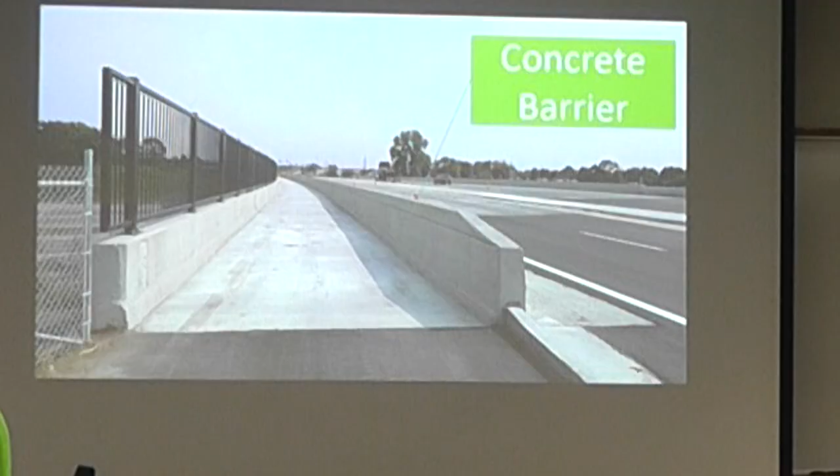So the primary purpose of the barrier is to provide separation with traffic, and in general the primary purpose of the railing is to provide pedestrian safety. This picture shows an example of the function of both of those things. On this one, we have a barrier separating traffic from running into pedestrians or vice versa, hopefully keeping pedestrians from running into traffic, but you never know. And the railings here keep the pedestrians or bicyclists from falling off the bridge, hopefully.

So here's a little video about how barriers do matter. Maybe of all the bridge construction items, barriers aren't really that interesting to talk about because there usually aren't too many questions or confusions when building them, and they aren't super interesting to construct either. But hopefully this video plays, because they do serve a purpose.

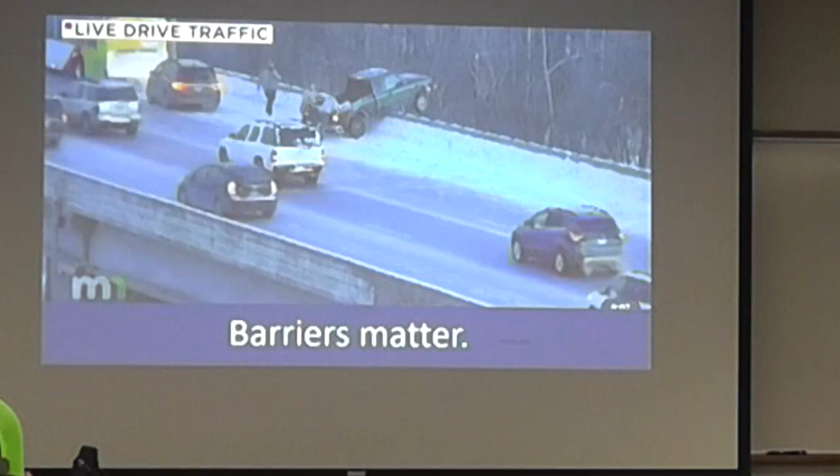Wow, that escalated rapidly. Fire down there. See where you go. Yeah, so this was, I believe, on the ramp of Highway 10.

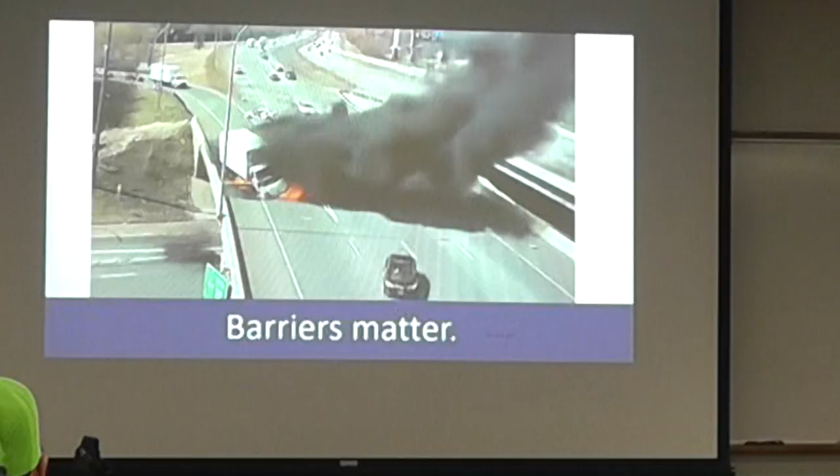But on this one, you can see the barrier served its purpose, right? No snow here to create that kind of ramp.

So hopefully those examples give you a little bit of an idea of why you should care about barriers.

One of the main things is safety, obviously saving lives. As you saw in that video before, the barrier didn't do its job, and who knows what would have happened if the truck went over.

So they help direct and keep traffic on bridges and in the direction they should be traveling. Basically, their purpose is to keep vehicles and the people in them on the bridge and not go over.

Lots of agencies, including MnDOT, spend millions of dollars crash testing barriers to make sure they're tall enough to keep large vehicles from crashing through, and redirecting vehicles back onto the bridge. The focus is to make sure they're strong enough that vehicles don't crash right through. So safety, stability, geometry and shape of the barrier plays a big part, and barrier strength is important.

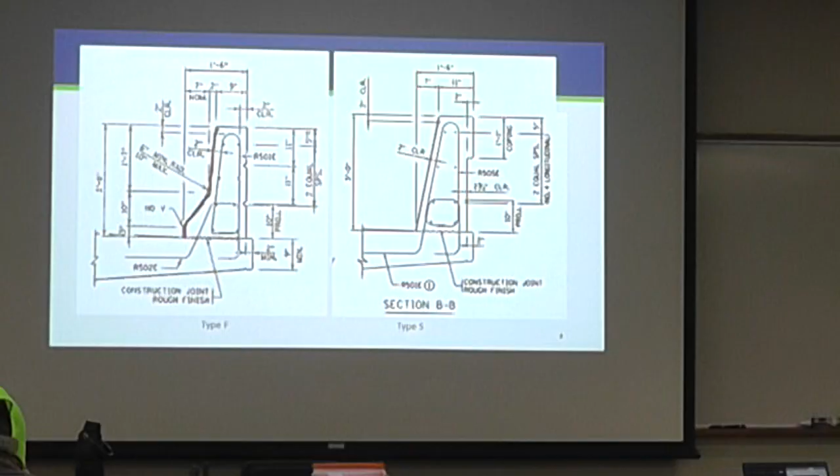On the left is the old F-shaped barrier, and on the right is the type S barrier. You can see the straight base of the barrier. This shape is for high-speed roadways and exhibits more consistent crash performance through testing than any of the other previous shapes.

A lot of these pictures in the presentation are also from the previous F-shape barriers, so keep that in mind as we go through. But now bridge plans have pretty much all been updated to include the S barrier. You might see some F barriers if there's a transition, creating a transition from the old type to the new type.

You can't immediately go from an old type F to a type S barrier abruptly, because then you create a snagging hazard due to the difference. So you might see a transition during construction as well, if you're connecting into an old one.

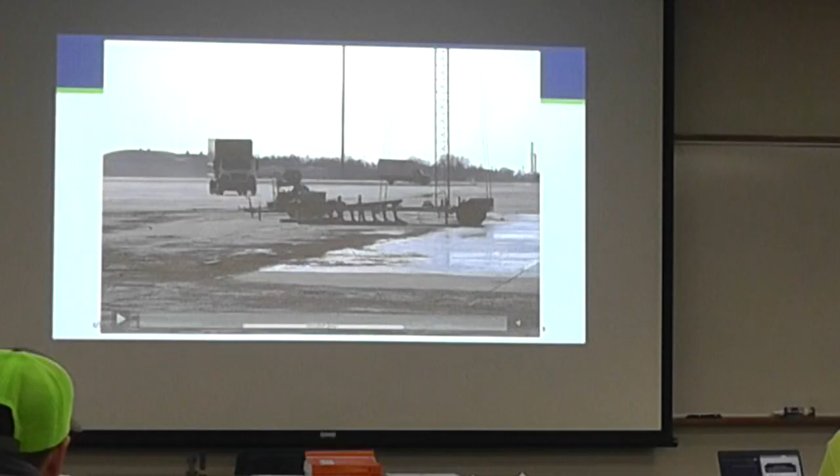So all barriers require crash testing and have to meet certain crash or test levels to be used. Bridge railings in these crash tests must prevent the vehicle from going through the railing, prevent barrier debris from entering the vehicle, smoothly redirect the vehicles, prevent rolling over, and ensure the impact on passengers from the crash is low too.

So I think this is a video as well, if it plays. Maybe not. Well, that was supposed to be a fun video of testing, but I guess it's not. I don't know, it is.

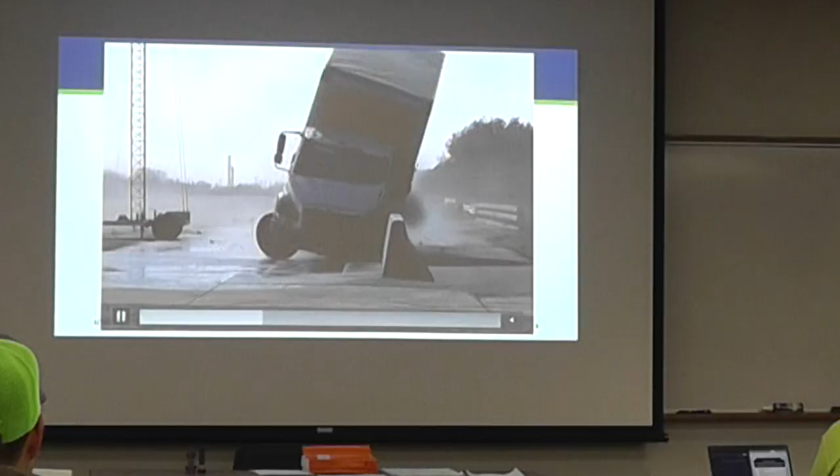Yeah, so you can see how the barrier does its job. It redirects the vehicle, prevents it from going over, and also tries not to significantly harm the driver. So that's the goal, to try to save everything as much as you can.

So another video, you can see the profile of this barrier. The slope of the barrier will actually cause this vehicle to ride up the barrier.

With the older shape, back when they crash tested these, they considered riding up the barrier positive, because it dissipates some of the energy from the hit. But obviously that could lead to rollovers and stuff. So now we've opted mostly for the single slope barriers.

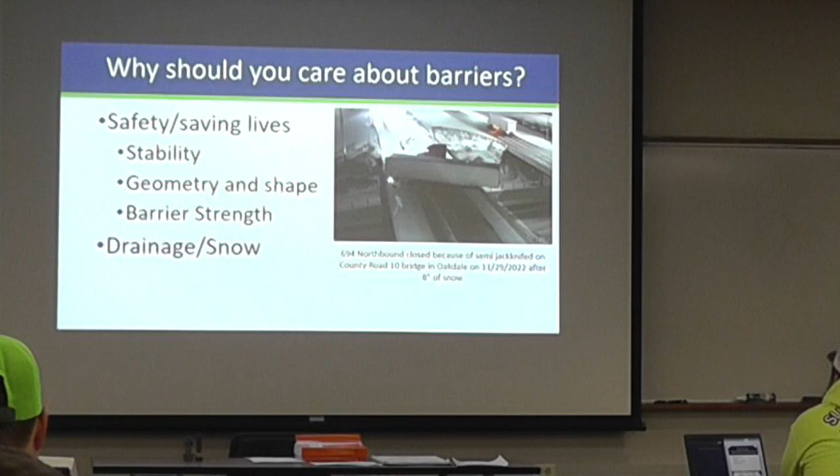Geometry refers to the shape of the system, trying to prevent rolling over and stuff.

Barriers are also important for drainage and snow. You saw in a couple of the videos how snow can pile up and create a little ramp too.

Making sure that rain and runoff is directed off of the bridge along the gutter line, keeping it from pouring off the edge down underneath the bridge onto traffic or whatever's down there.

It also leads to deterioration of the edge of the deck, due to the salty snow runoff.

Snow plows also use barriers as a guide for plowing, and it can be helpful to stop snow from going off the bridge and onto the traffic below during plowing.

Aesthetics is important too, even though it's not necessarily a safety or strength concern. A well-constructed barrier is important to the traveling public, and making sure it looks safe to people is also important.

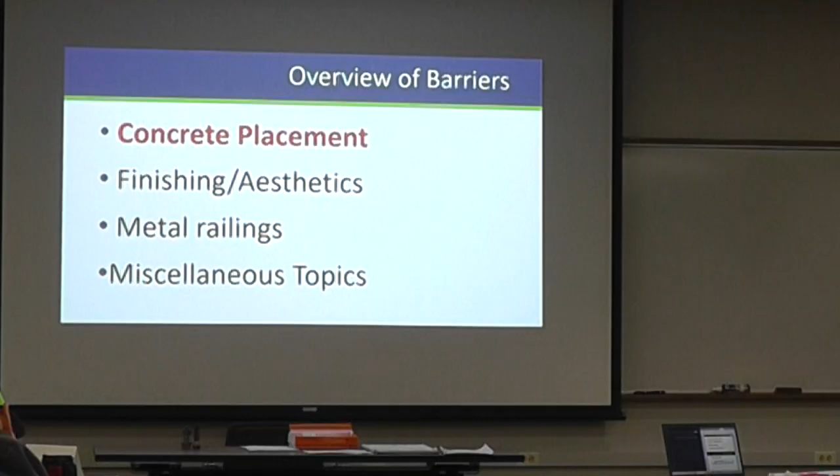So in this section we'll go over an overview of the key points of barrier construction, with a spotlight on where to look in the spec book to make sure your work meets spec. Four main topics we'll cover are concrete placement, finishing of the barriers and aesthetics, metal railings, and any miscellaneous topics that don't fit into the previous categories.

For concrete placement, to ensure that we meet stability, shape, and strength of barriers, following the standard specs and the special provisions for concrete placement is important.

If you look on page 352 of your spec book, there's a couple of pages there that are pretty important for concrete, probably some of the most used and most important for concrete bridge construction. We usually recommend putting a little post-it note in that section, because for concrete you'll be referring to that a lot.

One of the more important pieces of information in there, on the bottom of page 353, says to clean set concrete of loose material and dirt before placing fresh concrete against it. That's important - make sure you have a clean surface for the new concrete to go on.

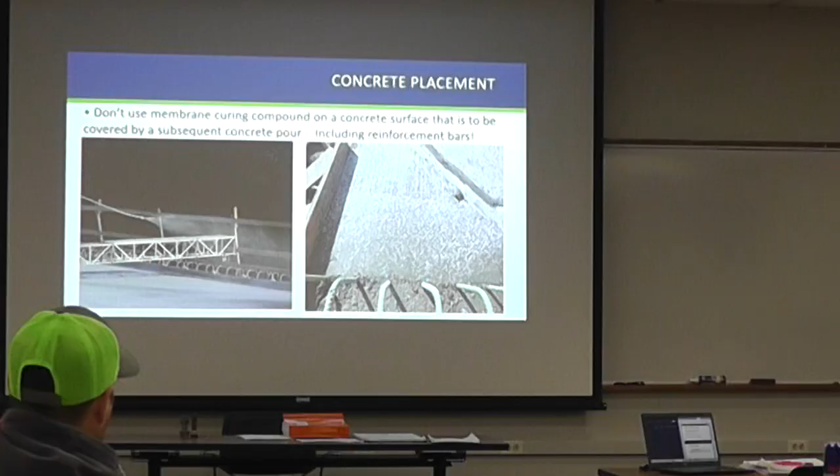In this picture, the barrier dowels should have been covered with wet burlap before spraying the cure. That's a good lesson to make note of.

The concrete barrier shouldn't be placed without authorization from the engineer until deck falsework has been removed or loosened, and after an acceptable bridge slab cure has been obtained.

The contractor can choose between two forms of construction for barriers: hand form construction or slip form construction. For slip form barrier placement, it's like a Play-Doh type mold where you use an extrusion machine - make sure they bring out the correct shape if you're using the mold.

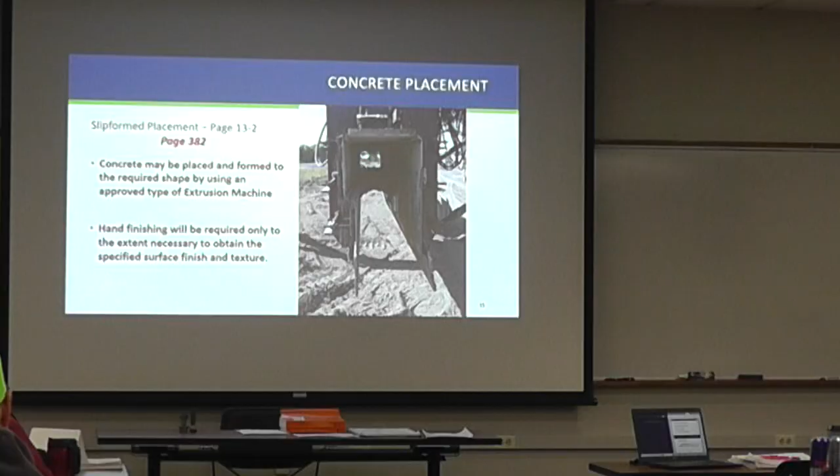When slip forming the barriers, we have to be sure that the concrete has less than 1.25 inches of slump. Concrete with slumps greater than that will be rejected. This helps maintain the uniform line and grade of the barrier. With consistent slump, the cement finisher will obtain a uniform texture through the pour too. This information can be found in the spec book, as well as the concrete mix.

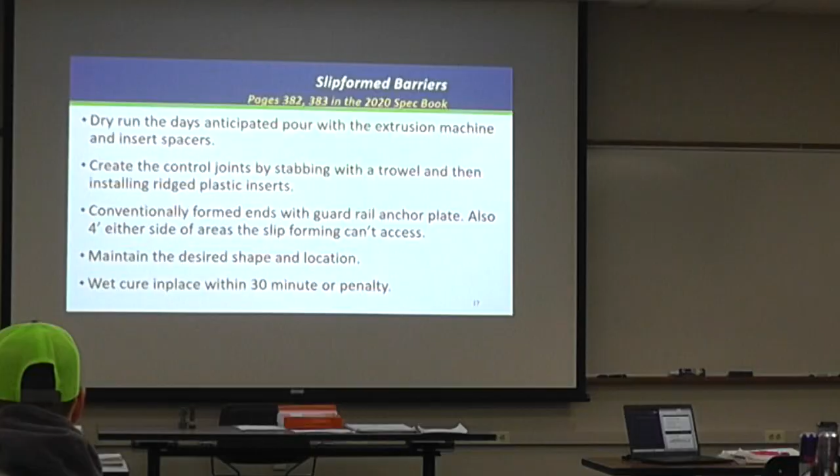With slip form barriers, before they pour the barrier, the contractor has to dry run the anticipated pour and check clear distance from the slip form template to the reinforcement. The contractor also has to make the control joints by installing rigid plastic inserts, as well as conventionally hand form the ends for 4 feet on either side of the joint, at the ends of the slip forming or where the guardrail anchor plate is located. Most importantly, they have to get the wet cure in place within 30 minutes.

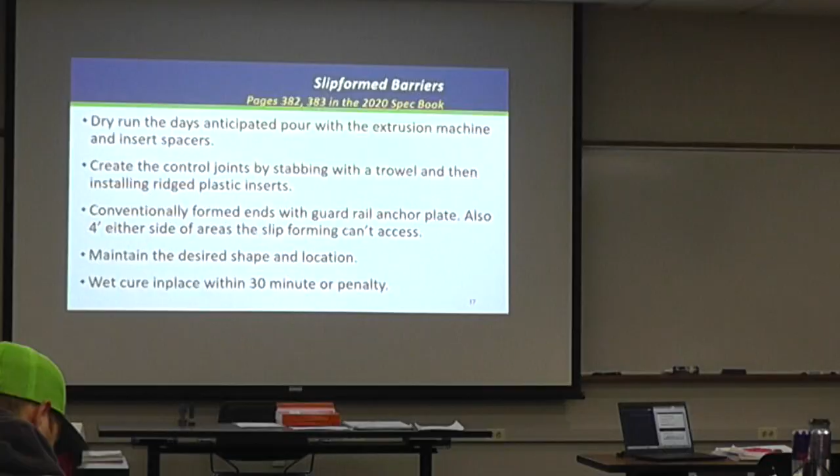I believe the department will monetarily deduct money for every 5 minute period or portion after that.

Regarding wet cure, special surface finish is considered a curing compound as per table 2401.3-3. I believe this is on page 373 of the spec book. You'll see that the concrete barriers, parapets, and end posts require a special surface finish. AMS curing compound is not an acceptable curing compound, and special surface finish 2 is an acceptable method of cure.

Here we have an example of hand forming while slip forming a barrier. There is a lighting conduit cast in it, so if we have a light blister that is different in shape than the mold, they wouldn't be able to slip form over this section. This short section will be hand formed after the rest of the barrier is slip formed.

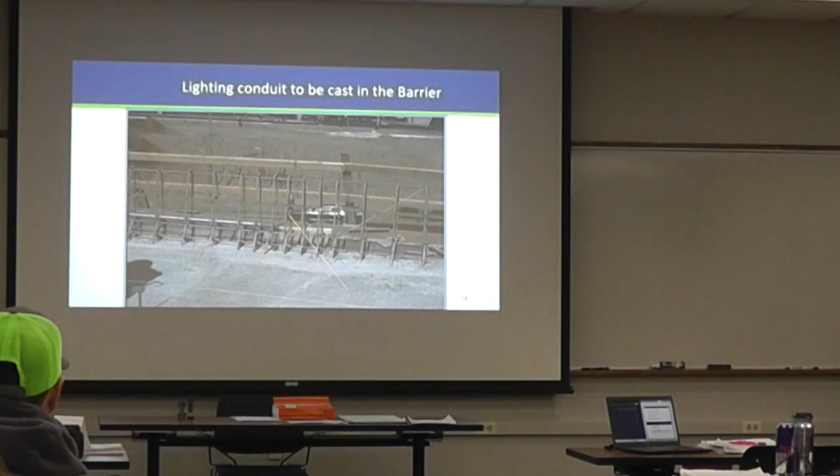Another picture here, you'll want to make sure they have at least 2 inches of clear distance from their reinforcement on the front face. Check the plans too, some plans have even 3 inches of cover. This clearance is important because you want to try to keep the salt away from the rebar as best as we can.

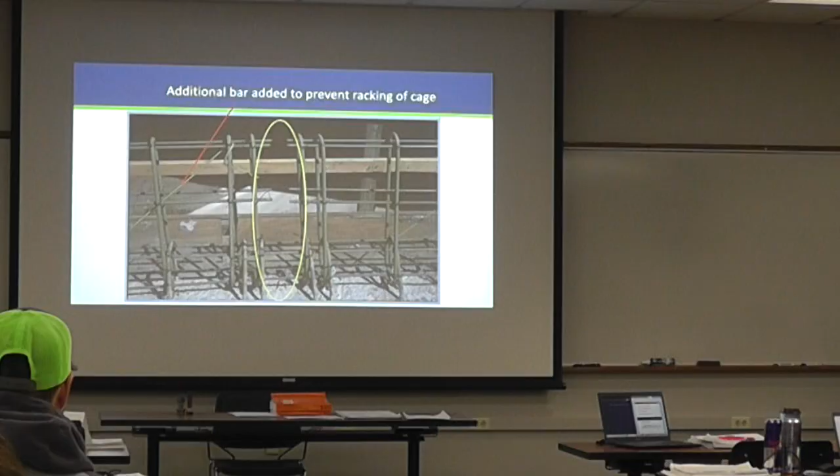If slip forming the barrier, the contractor needs to install additional reinforcement, these little bars, to make sure the machine doesn't pull the cage along with the form. This one's an old picture, so the longitudinal reinforcement is tied continuously now. You don't have these gaps, which create a weak point in the barrier, and we don't want that.

Here's an example of something that we think is a result of the shifting slip form, and it pulled the rebar to lap over the bridge joint. We aren't 100% sure of what caused this, but that's something we suspect, so making sure the slip forming isn't pulling the rebar is important.

If the contractor can't slip form the barrier and has to hand form it, the form shall be either metal, wood, or suitable material capable of sustaining the concrete in the proper position until the concrete is set. It shouldn't move when you start pouring wet concrete, and the forms must conform to the required shape and design.

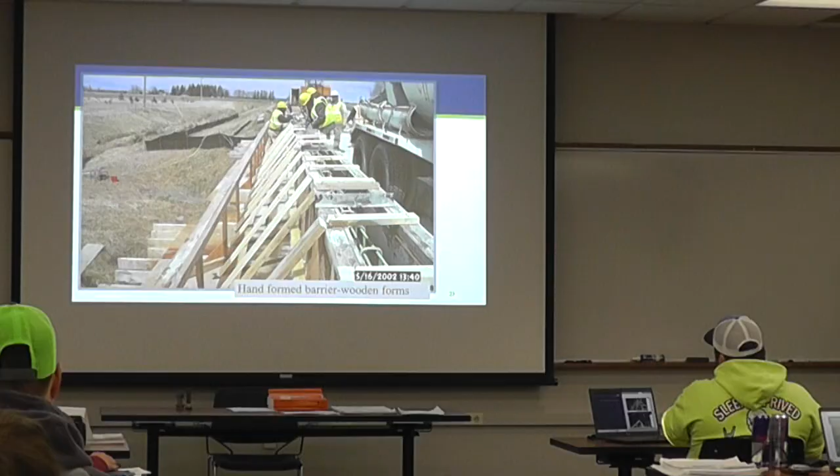The placement of the concrete shall be controlled to prevent segregation. As they pour the concrete into the form, there's only a small opening at the top of the barrier, and there's all sorts of bracing. The rocks will want to segregate out of it, so it needs to be vibrated to fill all the voids, and struck off to finish the elevation and create a smooth finish. Make sure the contractor does not over-vibrate the concrete. Over-vibration will cause segregation, in which the cement and sand could travel to the surface, leaving a weak surface that weakens the barrier.

When pouring these cast-in-place barriers, we're going to keep the shape of the forms that were constructed and signed off on. Concrete weighs a lot, so it has a tendency to blow or widen out its forms if you don't have these bottom walers. Make sure the contractor has the snap ties and rods to the correct dimension to keep the form from moving while pouring. It's important to keep the form from moving.

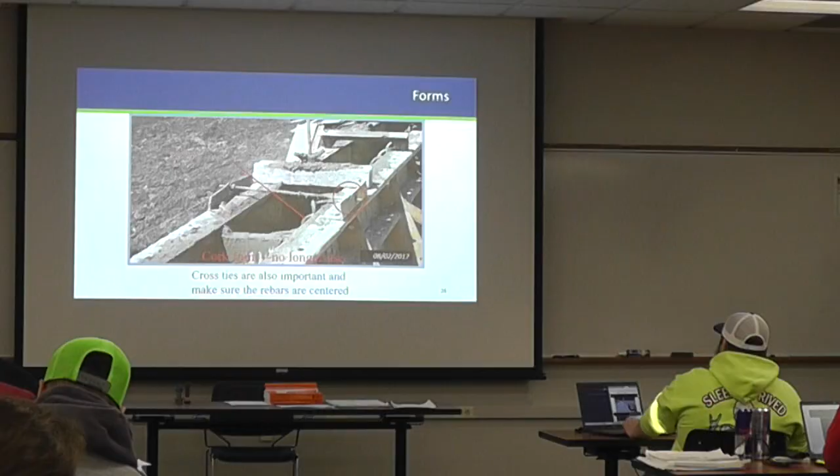Here we also have these cross ties to keep it lined up. So here's something that happens if you don't have enough bracing on the wood forms, it doesn't meet our minimum surface tolerance of a quarter inch of deviation within 10 feet of length of barrier.

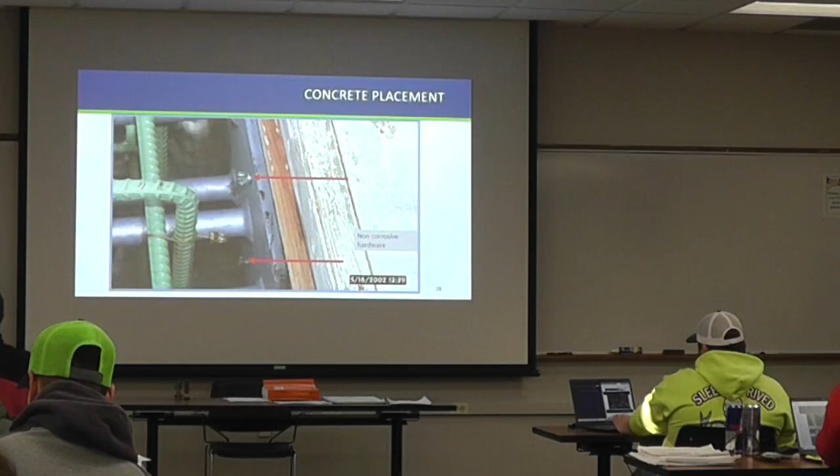Any hardware installed on the barrier must be non-corrosive. Where a guardrail is installed, these sections can't be slip formed, so they'll always be hand formed. Make sure nothing there can rust or deteriorate over time, and check the barrier and railing details in your plan set to ensure the contractor is installing the right guardrail anchor plate correctly per the plans.

Here we have a cover plate located at the expansion joint. Make sure they build this into their forms prior to pouring the concrete, and make sure the anchors for the cover plates are well embedded in the concrete.

A relatively recent change for barriers is that all four bottom longitudinal bars are now number 6 bars, they used to be number 4 bars. There's also a designer note now that limits the length of all barrier longitudinal bars to 40 feet. It was already in the design manual, but the note adds clarification since some people were stipulating longer bars in their plans.

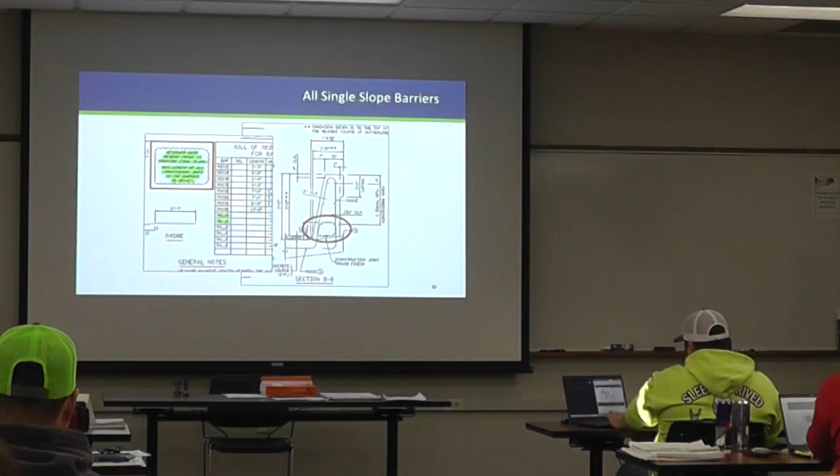Further, for removal, we used to require that the forms stay on for at least 12 hours. Now we just state that the barrier forms may be removed when the concrete is self-supporting and retains its molded shape, instead of putting a minimum time period on this.

You'll also see a table in the specs for curing requirements. For barriers and parapets, the minimum strength required to pull the form is when the concrete is self-supporting, so there's no minimum time. But we do have a maximum timeframe, forms must be removed within 12 hours.

After the forms are removed, the contractor is to round the edges to the radius shown in the plans. Even after the 12 hours, the concrete is still somewhat workable when they remove the forms, but after that point it gets tougher. The main thing is to make sure the concrete is self-supporting before removing the forms.

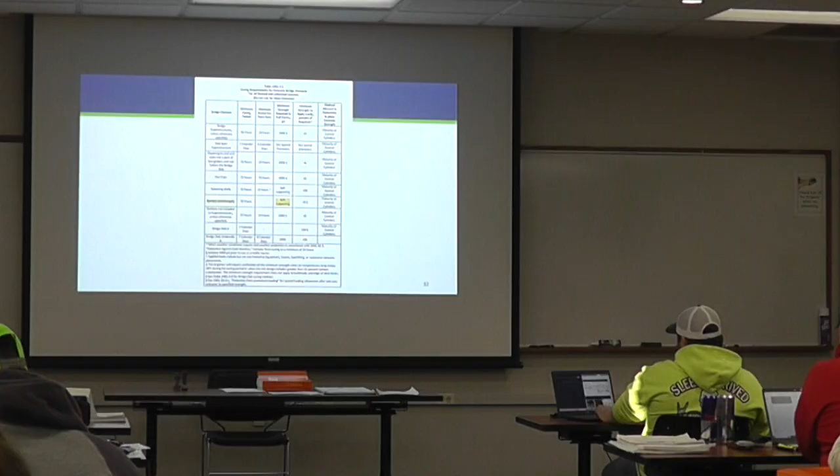According to the special provisions for special surface finish of concrete surfaces, the contractor is to remove the forms as soon as the concrete can retain its molded shape, and in no case shall the elapsed time between concrete placement and initial surface finishing exceed 12 hours. Everything I mentioned is noted in the special provisions.

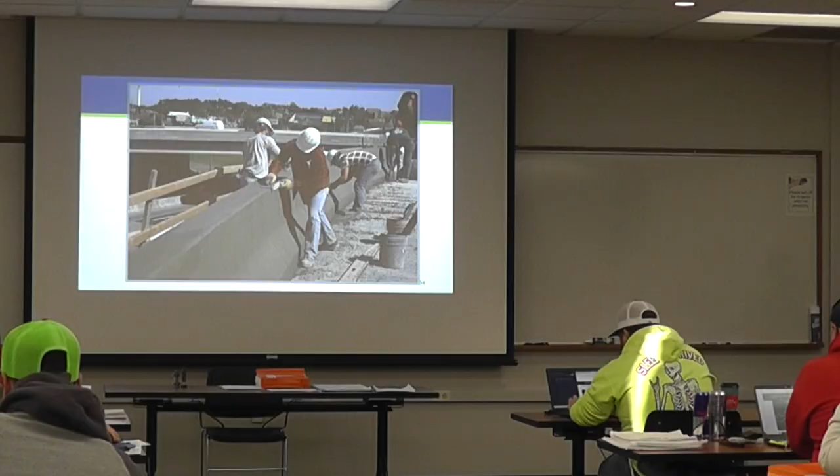After that, here are the barriers getting groomed after the slip form finishing. They'll go along and measure beforehand, or during their dry run, and spray paint on the deck each place where the rigid plastic inserts for the control joints have to go.

Here they're finishing the bottom edge. Note that line mark there, that's what I was talking about with the control joint location. Control joints are specified on the plans, and this newer control joint design has been used since around 2014.

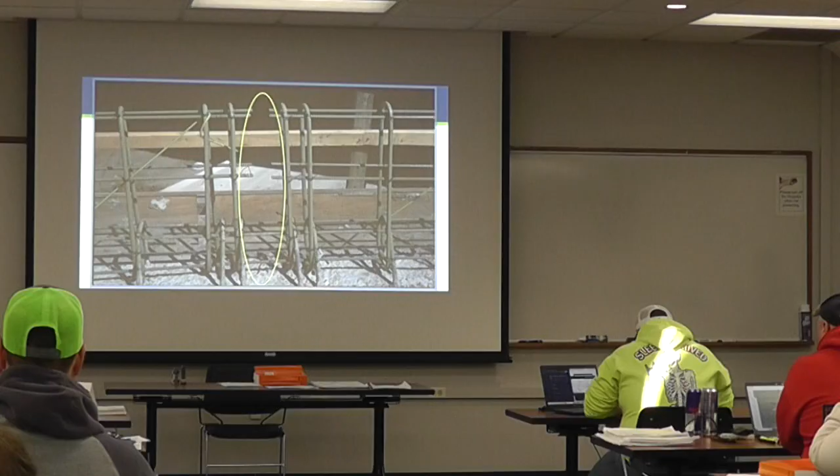Now we have continuous reinforcement along the barrier with control joints instead of cork joints. You can see the old reinforcement where it was cut off, but as mentioned before, that creates a weak point, so we don't do that anymore.

At the end of the bridge, the last few feet of the barrier, the dowels are spaced much closer together. That's because at the end is where we want to strengthen the barrier the most.

For slip form barriers, they're using plastic inserts for control joints. Popular ones are the zip strips and the speedy joint, both currently on the approved product list. Just look under the crack and joint materials products, then look for the rigid plastic extrusion.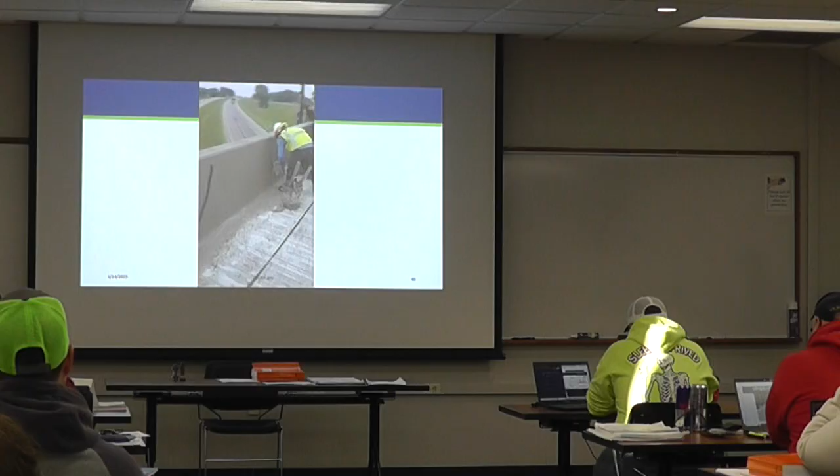Here's a quick demonstration of the process after a slip form barrier. They saw cut a relief of about 1.25 inches into it, then put in the plastic control joint. Then they finish the surface, and it's kind of hidden away now, so for people looking at it, it's not even there as far as they're concerned.

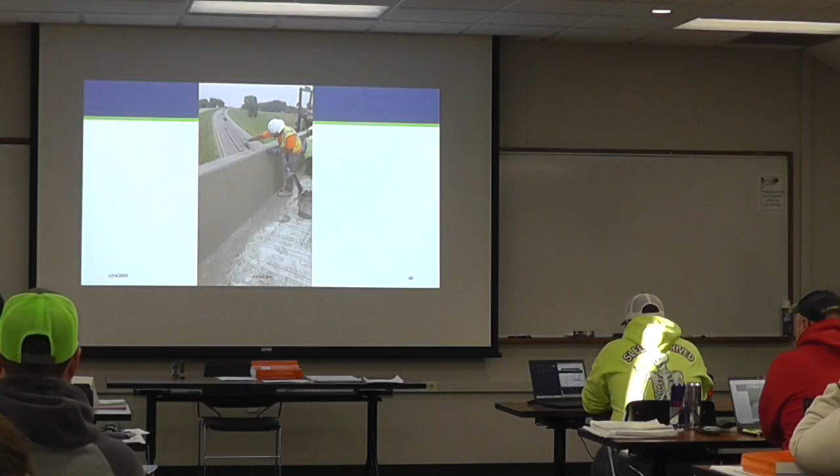Yeah, so this is a relatively new barrier install. You can't really see where the plastic insert was installed, except you see a little hairline crack there.

But we can tell by the shape of the crack that it's a straight line crack, and that's what we wanted. That's why that's where we wanted it to crack at the joint.

Compared to other cases when there isn't that control joint, it's not as straight. We want to avoid that.

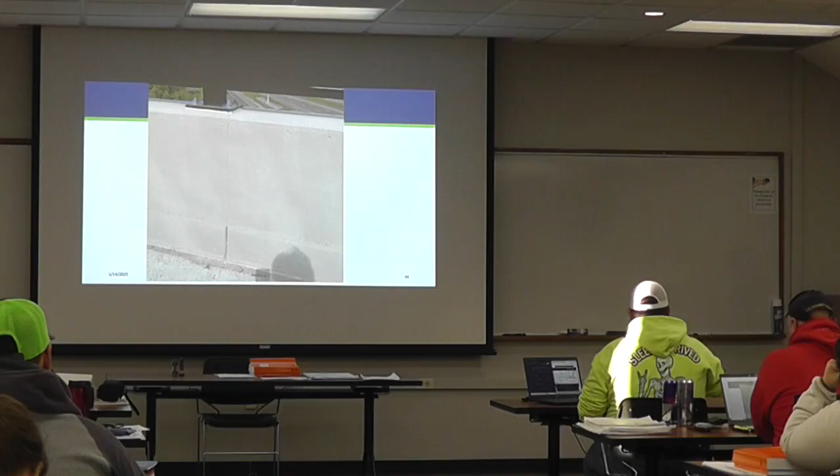One thing is, don't install control joints next to anchorages, because now the anchorage has less cover due to the location of the plastic control joint. There's more of a risk of failure.

Bridge plan details the spacing where the control joint should be installed, with spacings of less than 10 feet between each control joint.

You'll notice that according to the plan, none of the control joints are located at the same location as the anchorages for the railings. This sheet is actually for the previous picture we saw. So clearly somebody deviated from the plans and put the control joints where the anchorages were. So it's just something to pay attention to.

It's important to review the barrier sheets for details like that. For integral or semi-integral abutments, there's a saw cut in the joint in the deck between the bridge and the approach panel, which I'll get into later because there's an update for that, but you need to make sure this also includes the saw cut gap in the barrier at the same location.

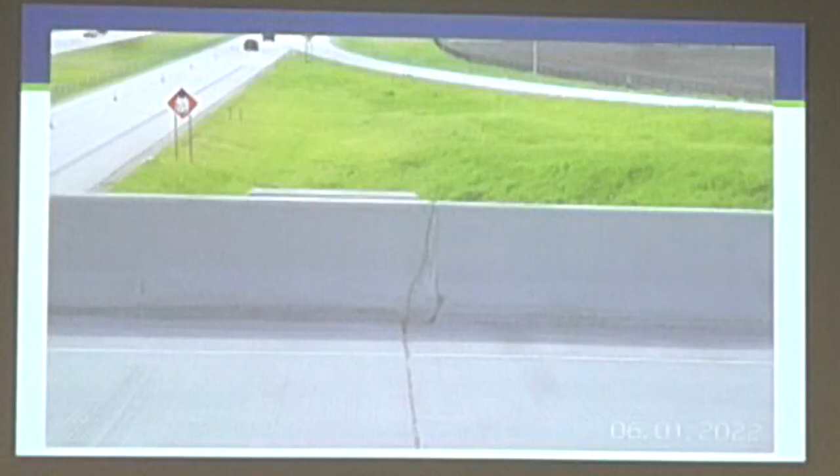Here's another example. This concrete is going to crack here, so our goal is controlling the cracks and putting the cracks where we want them, which is why we want those plastic inserts, so it's a more controlled crack that's straight.

One last thing to look for regarding these cuts is timing. Here's an example of the brand new barrier transition. The old barrier had a substandard end post, and part of the new approach panel, the barrier, I think on this one the bridge plans called for a 1/4 inch wide saw cut through the entire barrier width and height.

This shows that they just cut it partial depth and only on the front and top faces. So pay attention to details like that in the plans.

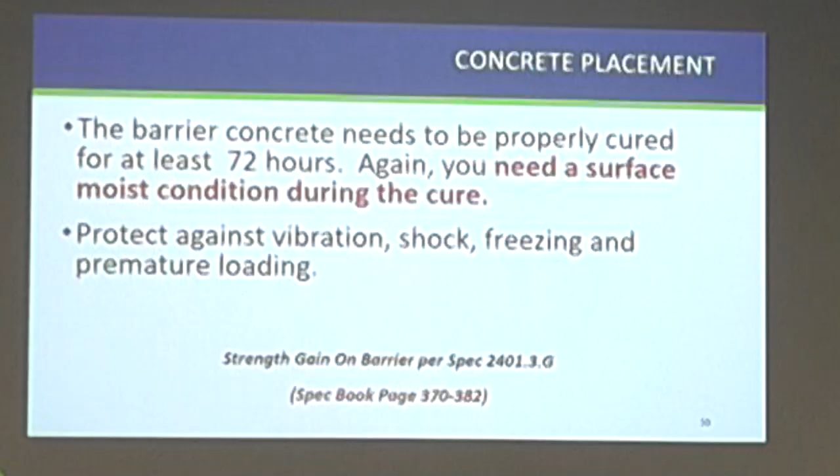Barriers need to be properly cured for at least 72 hours, and it needs to be a wet cure, so you need a surface moist condition during the cure, and then protect the barrier against vibration, shock, freezing, and premature loading.

The contractor can't subject concrete barriers to loading until it's at least at 45% of its anticipated strength. Don't allow heavy equipment on the deck. You want to wait until the barrier's cured, and barrier concrete needs to have reached 4,000 psi prior to opening to traffic.

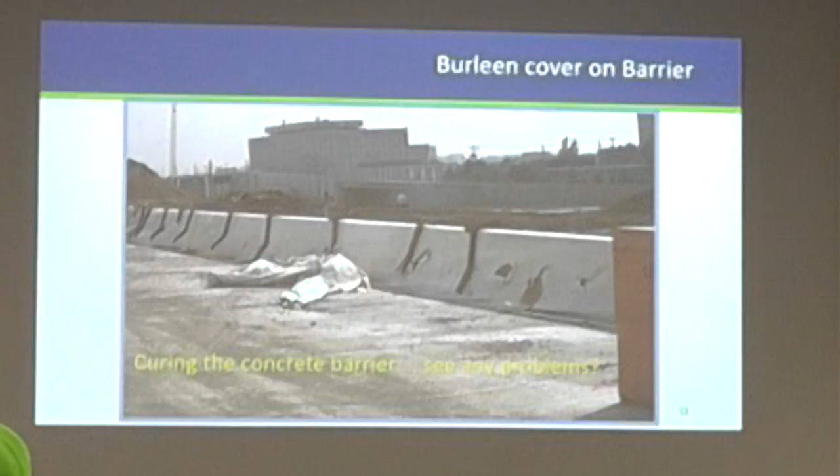Next section we'll touch on is the finishing and aesthetics of the concrete. Probably should speed things up here because I think I've got to keep on schedule.

All barriers get at least some sort of a finish. They may not always get what we call the special surface finish. But barriers that are conventionally formed will always get at least an ordinary surface finish, and then typically they will also get a special surface finish.

I think in one of your handouts there's this flow chart that'll help for special surface finish, which you can look at.

Historic bridges have their own sets of requirements, so pay attention to the special surface finishes for historic bridges.

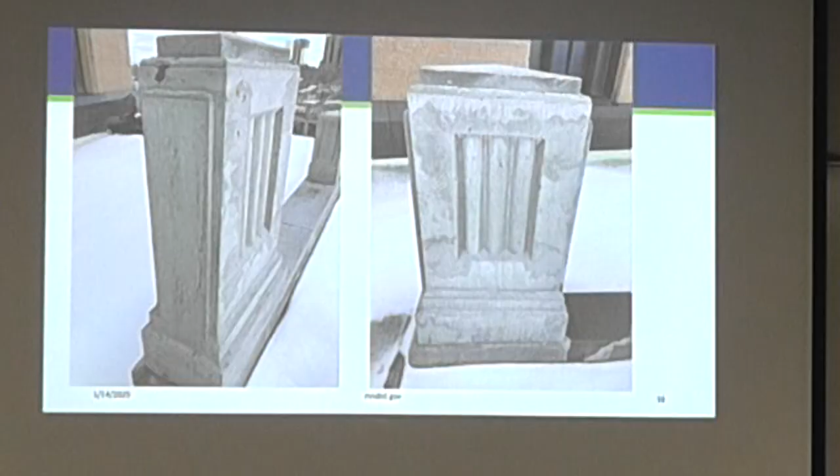Ordinary surface finishes can be found in your spec book. For these, forms should be stripped and the green concrete rubbed out immediately, but if they can't get the forms off without destroying the concrete, then they have no choice but to leave the form on.

If the contractor slip forms the barrier, it's a lot faster, and they can do about a few thousand feet in a day if everything is set up. Again, the ordinary surface finish will start immediately after removal of the forms and carried on to completion.

We're kind of getting away from special surface finish 1 and moving towards special surface finish 2. There's limited products like this, but it gives a lot more chloride resistance than other products. We're trying other products, but as far as I know, nothing's come of it at this time.

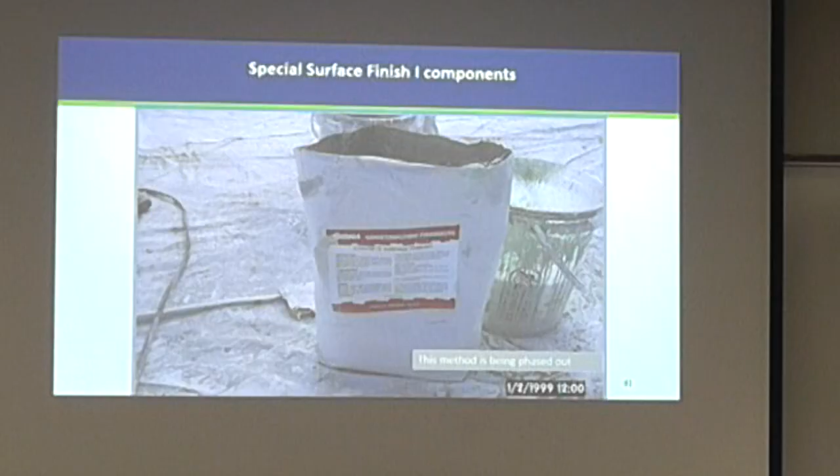Don't mix different compounds, always use the same brand components, and make sure it's applied uniformly. All surfaces requiring the special surface finish must be sandblasted or water blasted before application of the special surface finish. Power grinding is also allowed.

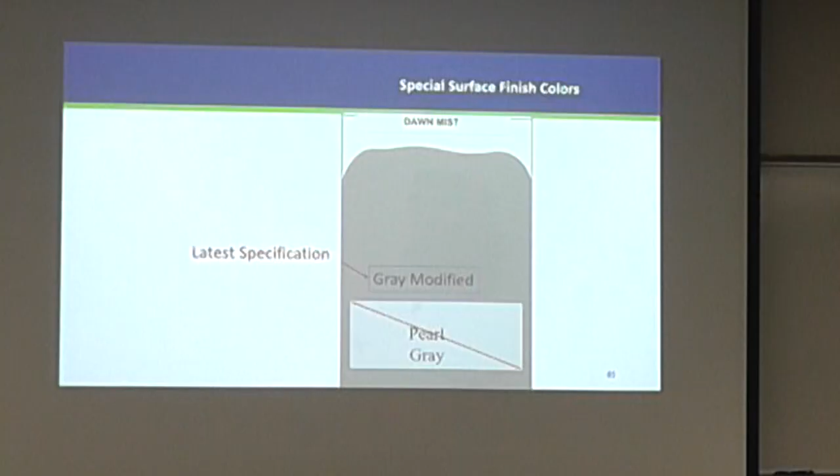I think the latest specs use a gray modified depending on the corridor. Certain projects attempt to match colors used in the same corridor, so just make sure to check your special provisions.

For aesthetics, for pedestrian crossings on the bridge, fencing is important. Normally we wouldn't go to these lengths for aesthetics on bridges, but for special cases there are requirements.

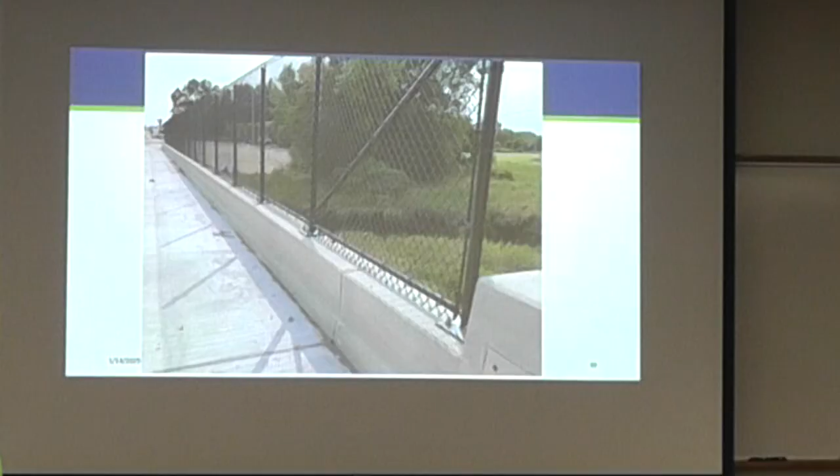The chain link fence can be galvanized or vinyl covered galvanized chain link. Check the specs if they want anything different. Different cities use different types of ornamental railings, some are historic too, so keep checking the specs.

The next section I'll go through is the metal railings.

I think this happened a few winters ago - a high-speed chase with a stolen vehicle. It came in way too fast, crashed through the railing, and actually went over the barrier. Just another reminder that what you do is important.

Like on here, yeah, barriers - even though it came at the wrong direction, it slowed it down enough. So I guess the lesson here is metal railings are not intended to keep vehicles on the bridge. They're designed to keep pedestrians and bicyclists only, not to stop a car. So that's the Jersey barrier.

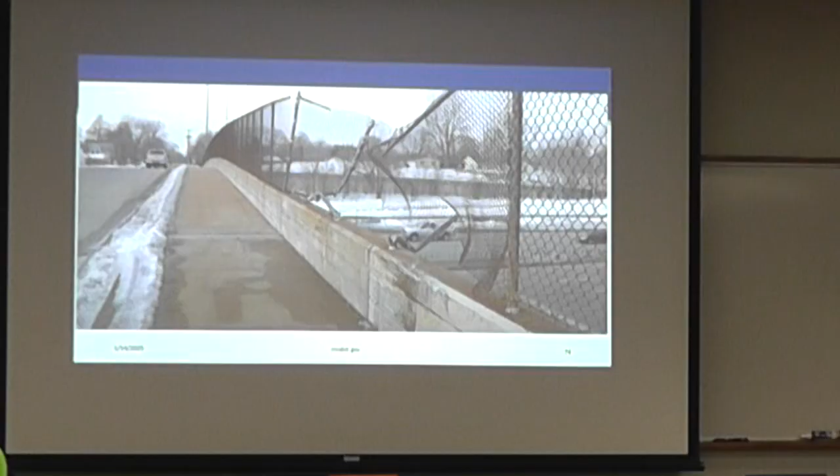There's another story, the result of a crash involving 4 vehicles. A driver hit a stalled car, crossed the center line, then plowed into a semi, and the semi went over the edge of the deck. This is the Clark Memorial Bridge in Kentucky.

I don't know if you noticed something on this bridge - it's just the metal railing and not the barrier. Remember what I said about the metal railing, it's not intended to keep vehicles from going over the bridge. So the main takeaway is the barrier keeps cars and vehicles on the bridge, and metal railings are for pedestrians and bicyclists.

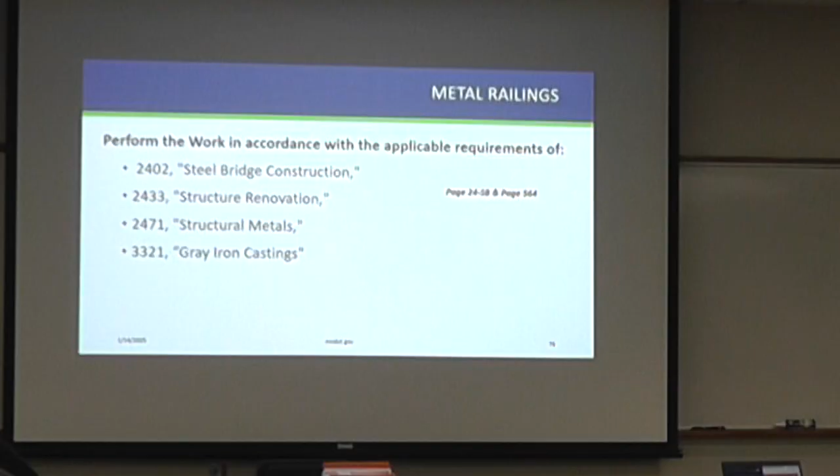So these are the specs for steel bridge construction, structure renovation, structural metals, gray iron castings for your metal railings. All the materials must conform to plan details.

Make sure they're galvanized - if the spec says to galvanize them, that they are. Check the paperwork, basically, is the lesson here. Check the specs.

Make sure there's nothing else missed. Make sure the shop drawings have also been reviewed and signed off by the bridge office, because some of these things can be picked up in shop drawing review too, so hopefully it doesn't get to the point where you're out there constructing and you notice something.

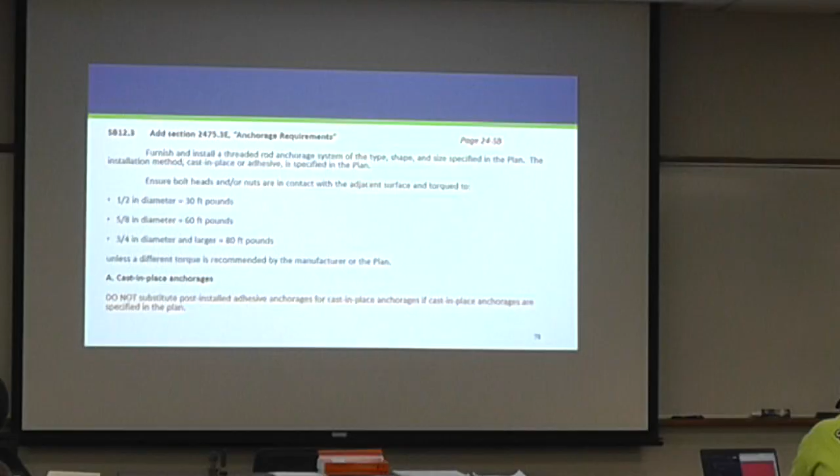In the special provisions, you'll find info for the anchorages for metal railings. As for the anchors, use cast-in-place type anchors unless otherwise specified in the plan. Typical size is 3/4 inch diameter bolts, which need to be torqued to 80 pounds unless the manufacturer specifies something else. All these things can be found in the special provisions.

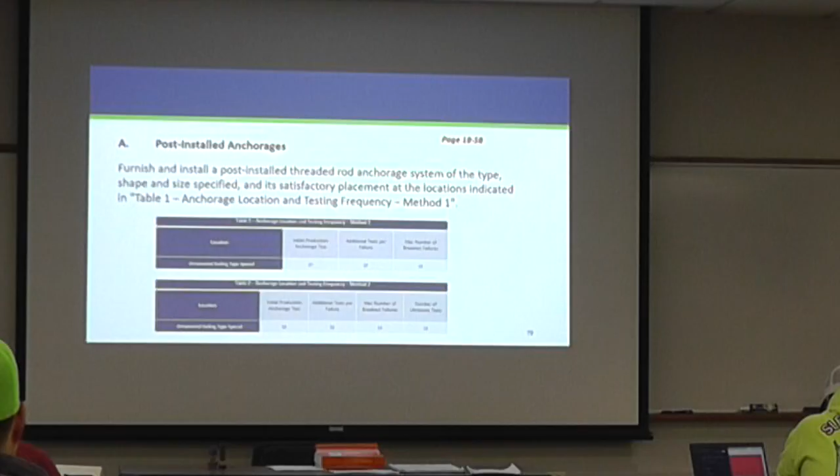Post-installed anchorages are indicated in the special provisions as well. They'll give you all the location and testing frequency. It's up to the contractor to determine which method they want to use - if they want to do testing beforehand on a limited number and have fewer tests after starting, or if they want to come in after the job is done and test a lot more.

We have requirements for documentation of the installation of the post-installed anchorages. Those installing the anchorages must be certified. It's a big deal because we've had some T1 barriers fail on us, so make sure whoever's installing it is certified.

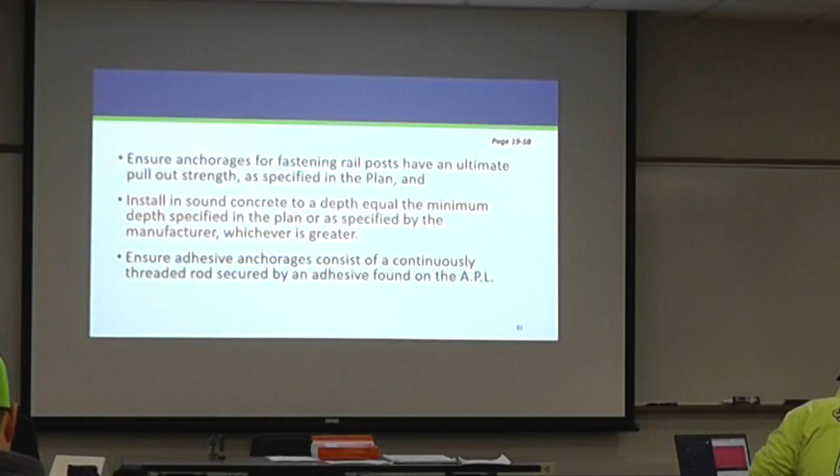For post-installed anchors, make sure you install in sound concrete to a depth equal to the minimum depth shown in the plans or as specified by the manufacturer, whichever is greater. Concrete adhesive anchors must be on the approved products list if they want to be used.

They must meet the following conditions for installation and testing: the concrete is greater than 14 days old, the surface is free of water prior to drilling, the hole is dry, and any additional requirements listed in the manufacturer's installation instructions.

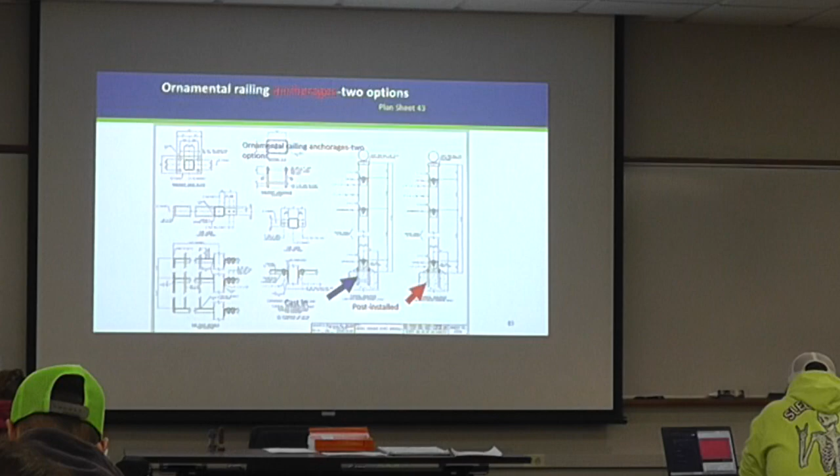Here's a cast-in detail or post-installed detail. The contractor has to be careful if they do the cast-in because we really don't give them a lot of space to get it correct. If they're off by a 1/4 inch each time on a 10-foot rail, all of a sudden it doesn't fit. So most of the time the contractor chooses the post-installed installation.

Always check the approved products list to make sure approved products are being used, no matter what the contractor says - just make sure it's on the approved list. Some stuff may not be on the list anymore that was previously on it, so always check the approved products list.

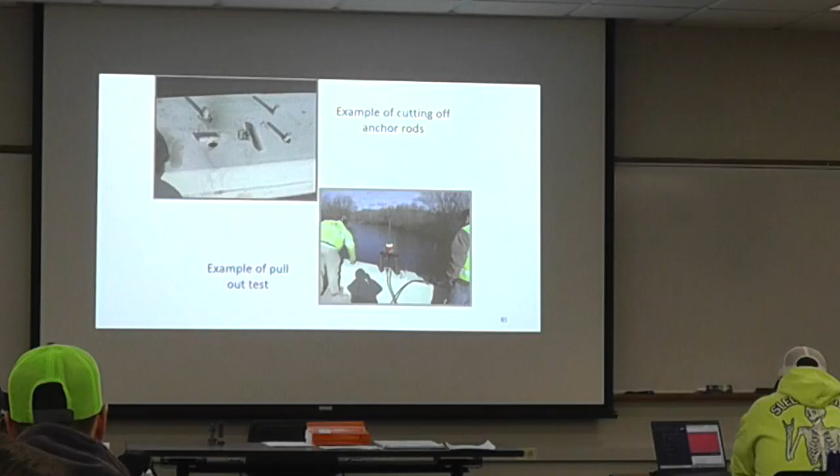Here's some examples of cutting off anchor rods and pull-out testing. Some contractors don't drill the hole deep enough because they're running into rebar and can't drill through it, so they don't want to get a core drill out and do it - they'll just cut the bolt off. But when they do that, the anchor will probably fail. They should core out the hole if they run into rebar.

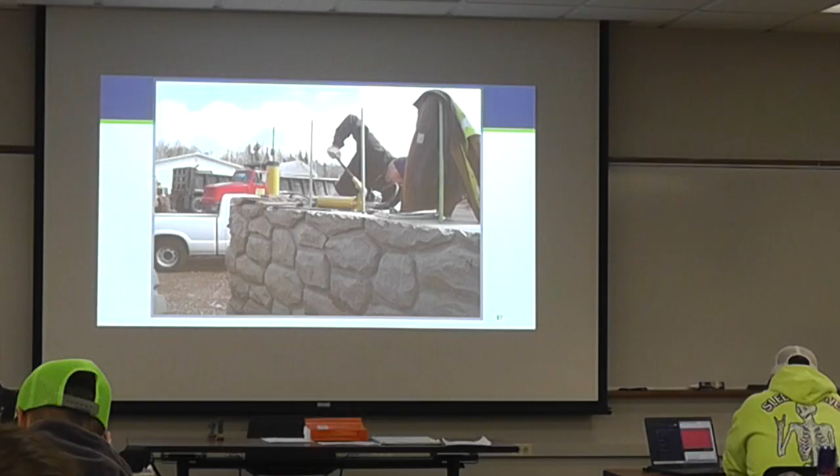Here's another example of a failure. Here's someone performing a test - again, make sure they're certified. We require that they're certified if they're doing the testing. Make sure the testing device is set up so that no portion of the device bears directly on the barrier concrete surface, and within a distance equal to 1.5 times the anchor embedment depth.

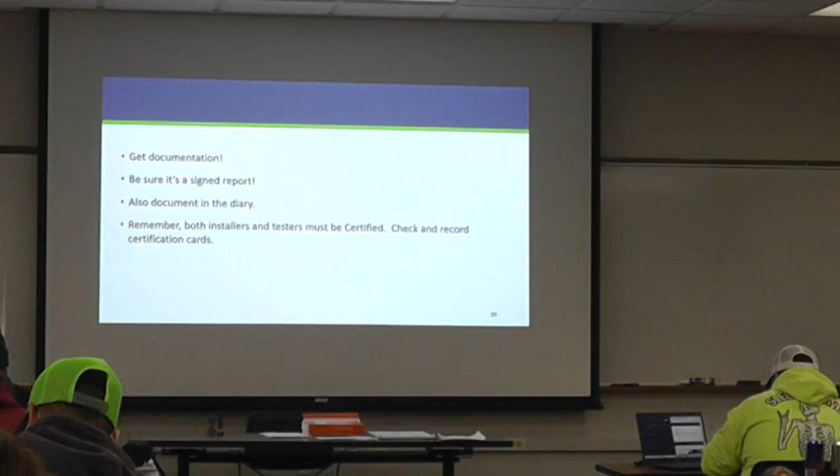So the main thing: use a certified tester, get documentation, make sure it's a signed report. Both the installer and the tester must be certified - check their cards, credentials, everything.

As for what type of coating the metal railings get, check the special provision for 2475. That'll go through all that.

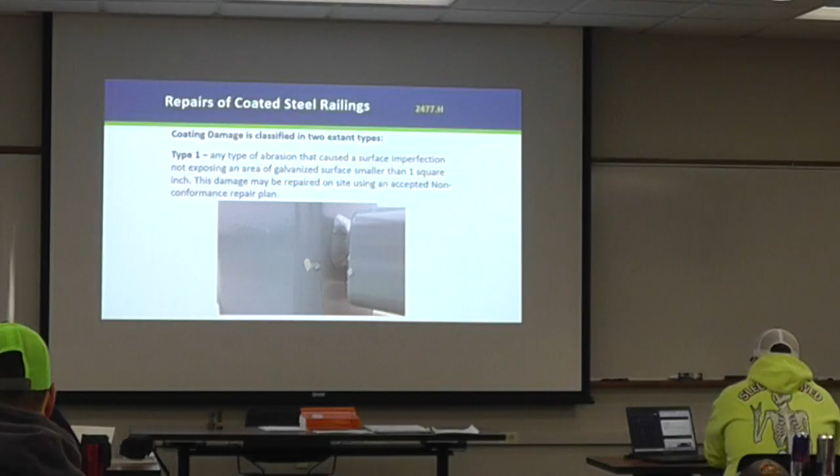If powder coating on the metal railing is damaged, there are 2 different types of repairs. Type 1 classifies damage as any abrasion that causes a surface imperfection - this can be repaired on site or in shop. Type 2 is more severe, as it exposes the steel surface larger than 1 square inch. This one requires these repairs to be made at the actual shop.

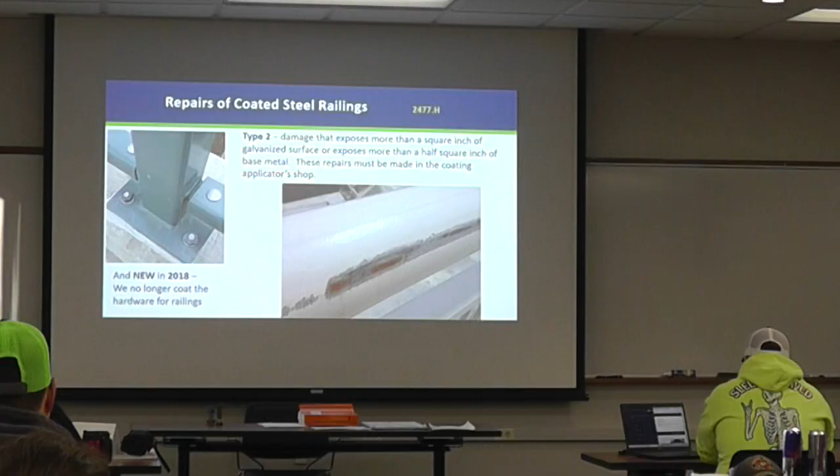The plans will show the control joint locations in the concrete. They'll also show the barrier height in these details too. If they put the wearing course on first, we still need that height - so if it's a 3'8" barrier, that 3'8" needs to be on top of the wearing course.

I think one thing for the railing is they have to be grounded for all metal railings and fences, so keep that in mind.

Now I can get to the miscellaneous topics. We had some complaints about barrier cracks at the end of the bridge. Cracks are supposed to occur at the control joint, but these control joints are either not getting cut soon enough or not being formed right, so you end up getting these cracks.

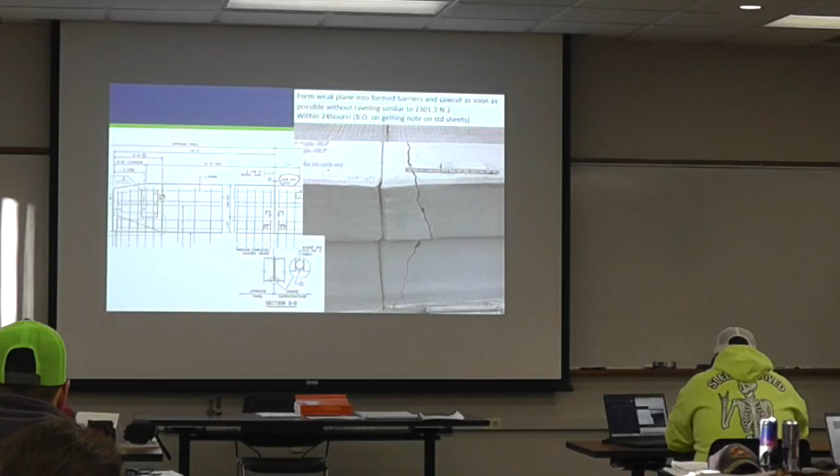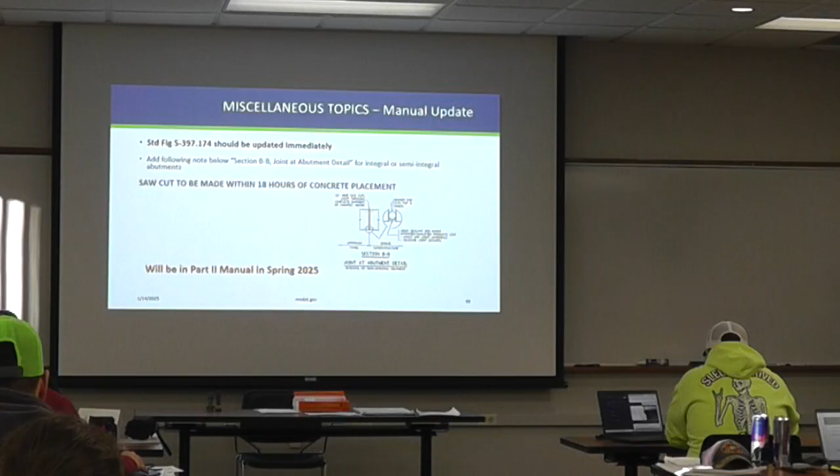This is a new thing that'll show up in the Part 2 manual in spring 2025. Remember earlier I talked about the integral or semi-integral abutments and the saw cut that needs to be made. The barriers are slip formed continuously, and cracking issues have been occurring if the saw cut is not made within 18 hours of placement. So this detail will be in the manual this spring, specifying that the saw cut for integral and semi-integral abutments needs to be made within 18 hours of concrete placement. That's a new item for this year.

Some new-ish, from a few years ago, stuff for median construction. Check 2401 for the deck surface finish under the barrier.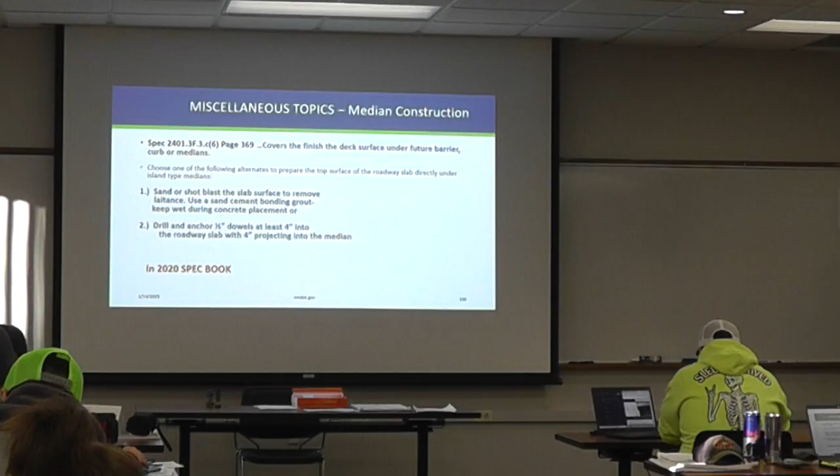Another thing, mechanical couplers are not allowed in barriers. Keep that in mind. We do not have any mechanical couplers on approved product lists, and this is why - this is what happens when the couplers are not fully epoxied.

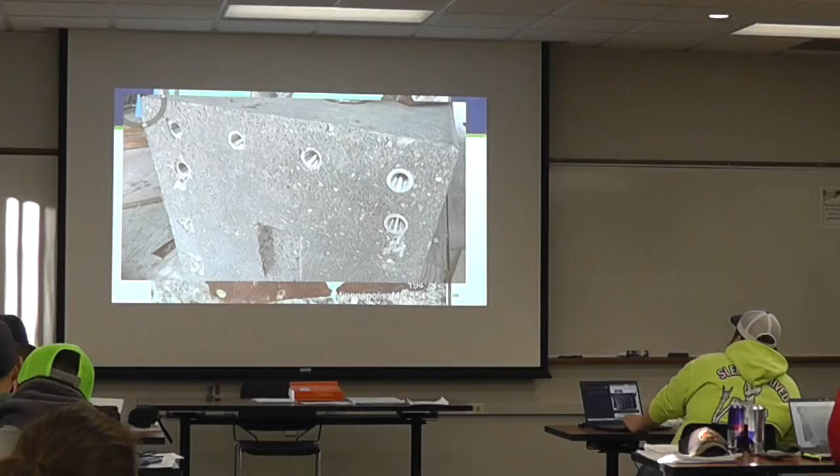I think we have a list of guidance on what to do if a contractor wants to use mechanical couplers. You can contact your regional bridge construction engineer. For Metro, that's me, and then there's a North region and a South region one as well.

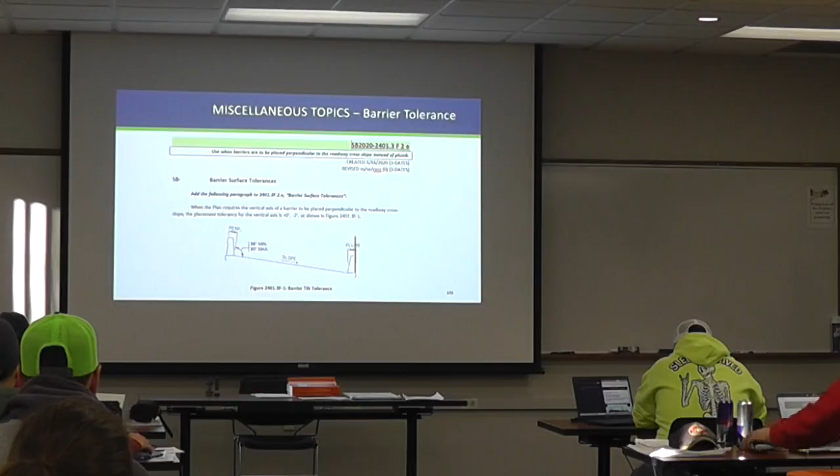Barrier tolerances. This will be used when there's a tipped barrier rather than a super elevated barrier. Notice it says the word plumb. When the vertical axis of the barrier is placed perpendicular to the road cross slope, the placement tolerance for the vertical axis shall be within 0 degrees to -2 degrees as shown in this figure. So when you have the super elevated cross sections, keep those tolerances in mind.

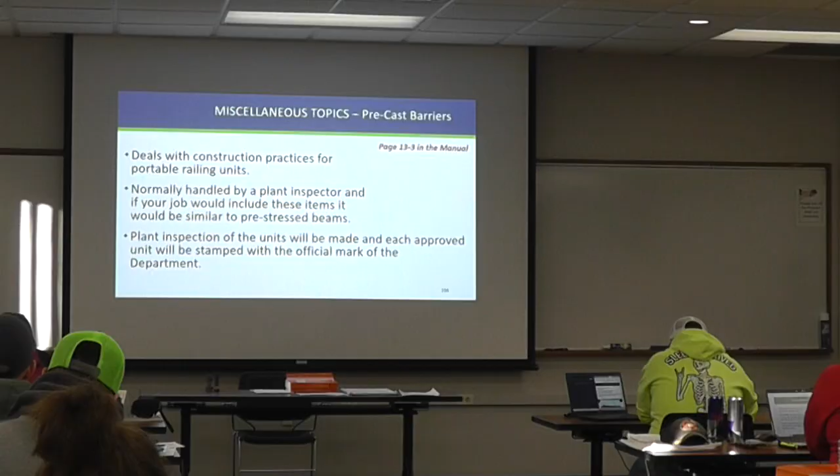Precast barriers generally are only used on construction jobs where they're doing stage construction - cast at the yard and then hauled to the job. All authorized repairs on those must be made before the unit is stamped, and no unit shall be delivered without the official stamp of approval. There's a stamp there.

How bad do those have to be before you take them out of service? I think it's pretty bad. I'm not sure what the exact requirement is, but yeah, there's some bad ones out there.

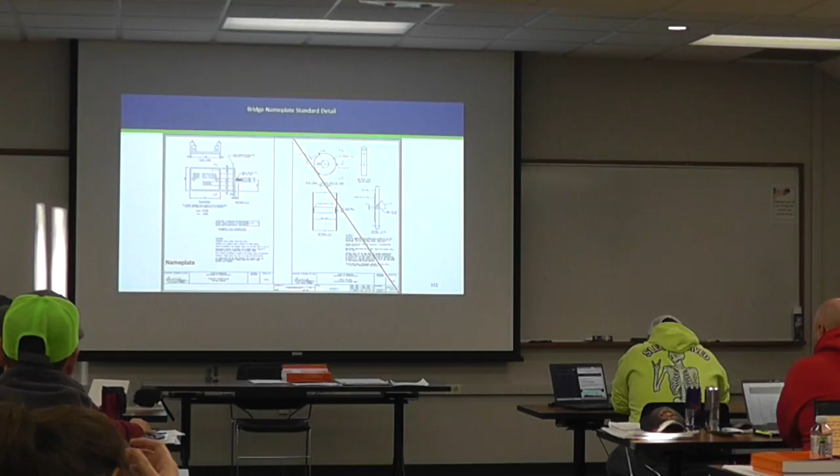Locations are on the plan, make sure they don't put it upside down. Probably looks great when it's looking down the corner. Yeah, this has just caused problems, so they have to be chipped out and reset.

So, okay, I think this is my first time presenting, so I'm not sure. Do you guys have something to answer these questions, or is it just kind of... we'll just say okay. Sure, okay, I'll ask the question here. Try to at least make sure you guys paid attention a little bit, right?

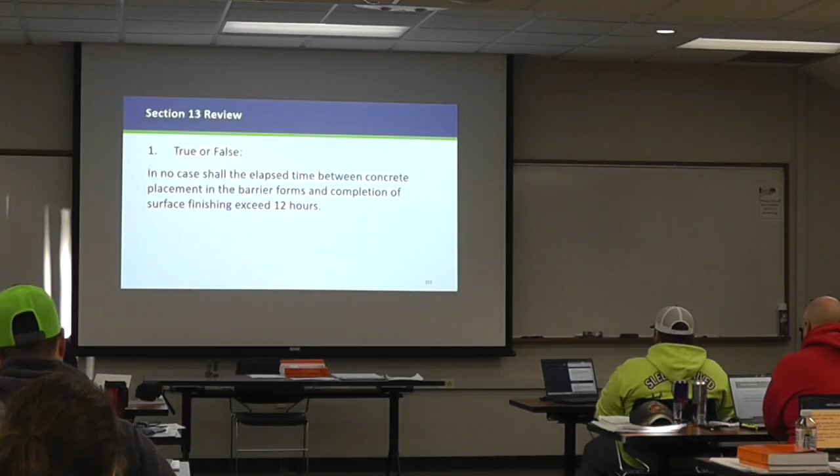True or false: in no case shall the elapsed time between concrete placement in the barrier forms and completion of surface finishing exceed 12 hours. Yep.

Next one, true or false: concrete barriers shall at a minimum receive an ordinary surface finish as specified in 2401.3 unless indicated otherwise. This one is true.

True or false: all surface cavities produced by form ties on exposed surfaces, any surface cavities with a diameter of approximately 1/8 inch and larger, and smaller surface cavities so closely spaced as to be conspicuous shall be thoroughly cleaned, saturated with water, and filled with mortar. Yep, false, you need 3/8 inches.

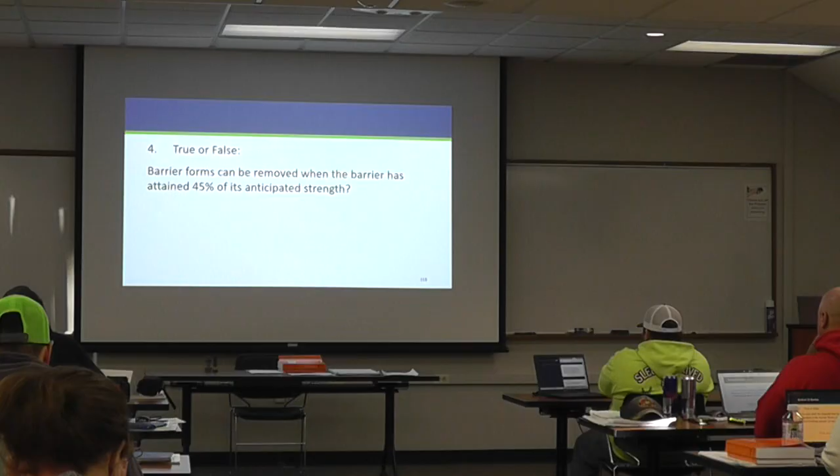True or false: barrier forms can be removed when the barrier has attained 45% of its anticipated strength. Yep, false, when the concrete is self-supporting.

True or false: slip forming of the barrier is permissible per the specifications. Easy one since we talked a lot about slip forming, right?

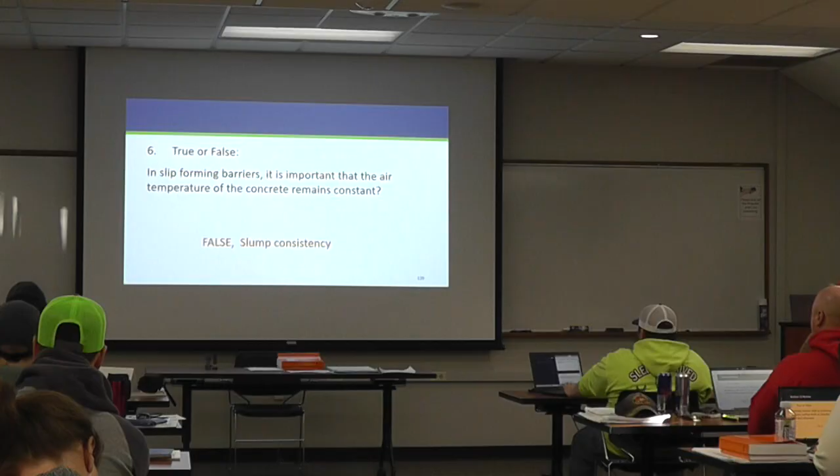And in slip forming barriers, it is important that the air temperature of the concrete remain constant. Yep. This one, we want the slump consistency. Does anybody remember what it was? 1/4 inch. Yep, 1/4 inch.

True or false: membrane curing compound, PAMS, is not permitted on the barrier surfaces. Yep, we do not permit that.

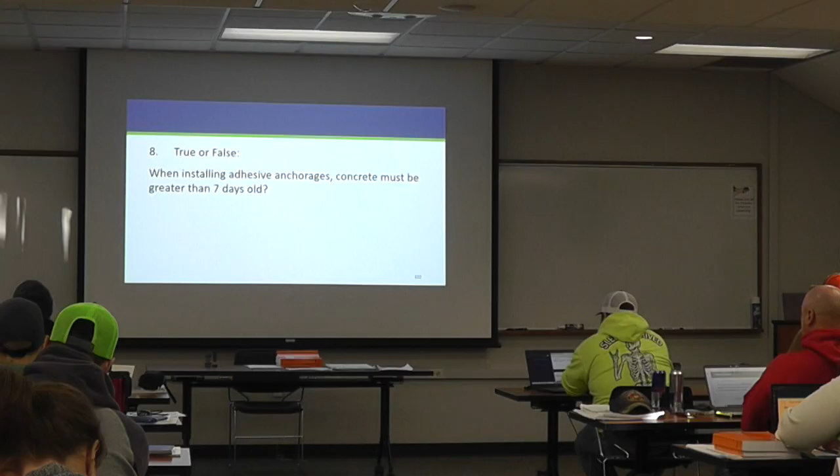True or false: when installing adhesive anchorages, concrete must be greater than 7 days old. It's false, it should be 14 days. Well, 14 is greater than 7. The way it's worded... I guess so, I can change that.

Barrier concrete shall not be subject to loading until the engineer has determined that the concrete has attained a strength that is not less than 100% of its anticipated compressive strength. Yeah, false. Once it's reached 45%.

The 4,000 psi, that's for traffic. Yeah.

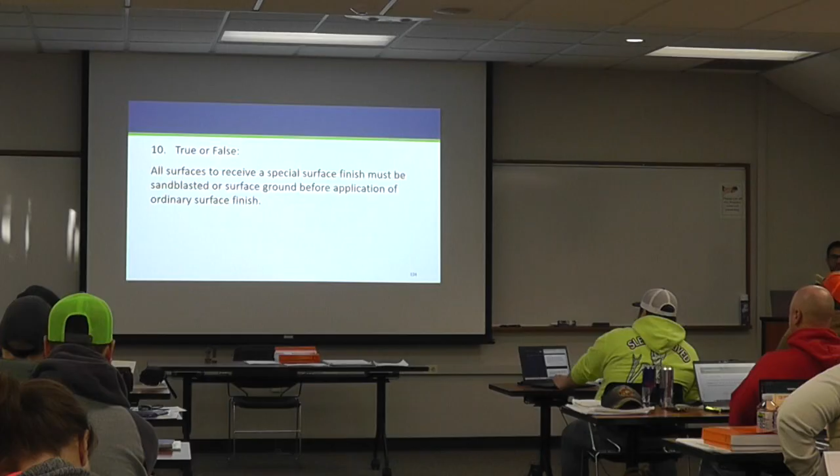And yeah, I think it's the last one here. All surfaces to receive special surface finish must be sandblasted or surface ground before application of ordinary surface finish. Yep, that's true.

Yeah, that's a good question. I'm not sure, because like you said, there's not much to tie into, but we do want the tighter stirrup spacing at the end. I mean, they only have 3 or 4 inches longer to get that tail to rest on the bottom mat of the approach panel. Right, it sure would be nice if that was coordinated. I realize the approach panel is roadway, even though we never have an approach panel unless there's a bridge.

But it would be nice if it would, because that gets to be really difficult. It's really tight spacing when you get down where the guardrail attachment is, and at the end it's just hard to get everything right when you don't have anything to support it or tie it onto.